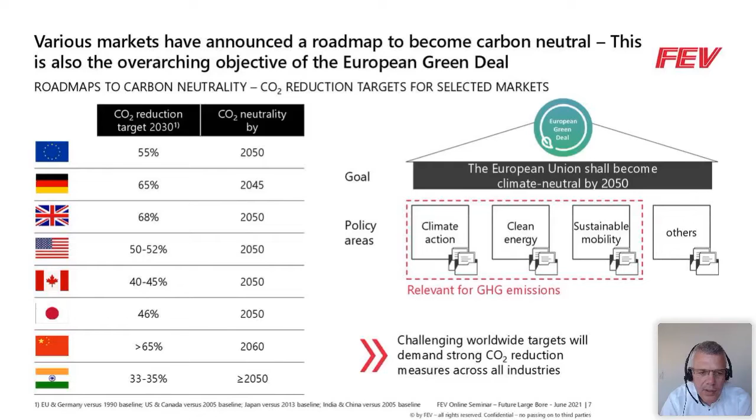So the key message here: these challenging worldwide targets will demand strong CO2 reduction measures across all industries. There will be no industry in the future that can neglect these overarching CO2 reduction targets. And if we talk about the contribution to overall worldwide CO2 emissions, the clear message from this slide is that the large bore engine sector is also a very important contributor.

On the other hand, for all of these industries, initiatives have already been started and put in place. Looking at marine, we have the IMO greenhouse gas reduction targets, minus 50% until 2050, and the long-term target to become greenhouse gas neutral by 2100 at the latest. There is also the so-called Getting to Zero Coalition, where some of the main marine fleet owners have already defined targets to become CO2 neutral at a much earlier point, in the 2030 timeframe.

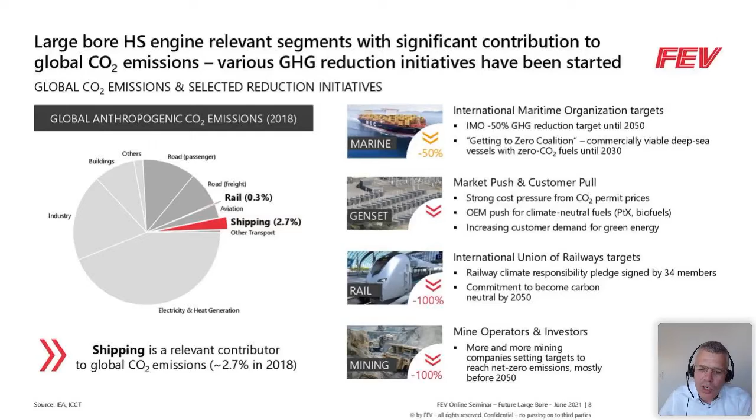For the generator set market, we also see a strong push. We have cost pressure from CO2 permit prices, and increasing customer demand for green energy. The rail industry has a commitment to become carbon neutral by 2050. And more and more mining companies have set targets to reach at least net zero emissions, mostly before 2050.

Let's take a closer look at the marine industry in the following slides. Focusing on marine, on the one hand, we have the IMO emission limits, which are not the key focus of today's presentation. On the other hand, we have several measures that already address reduction of CO2, respectively greenhouse gas emissions. First, the EEDI, the Energy Efficiency Design Index, which defines targets for CO2 emitted per unit of transport work. This includes, for example, the fuel consumption of main and auxiliary engines, so directly addressing the high-speed engines here.

In addition, we have the so-called Ship Energy Efficiency Management Plan, a mechanism to improve energy efficiency during ship operation and manage ship and fleet efficiency. And last but not least, as mentioned before, we have the IMO greenhouse gas targets, which set a roadmap for mid- and long-term greenhouse gas emission reduction for the marine industry. In addition, there might be local requirements, some market areas or cities, which will most probably define individual targets in the future.

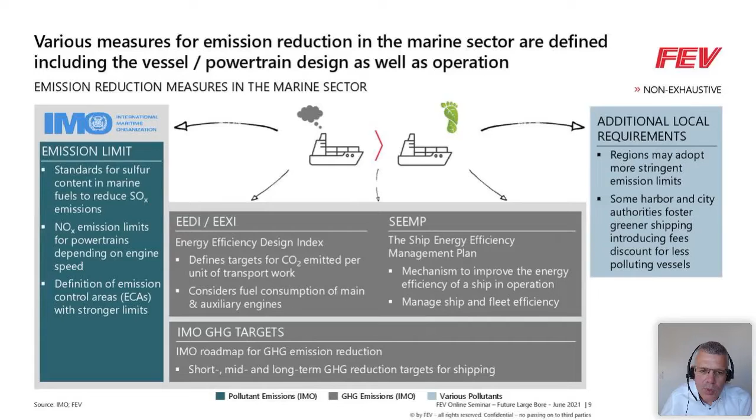How does that look from the timeline perspective? To focus first on the EEDI and SEEMP regulation: the first steps of the regulation are already in place. The next step of the regulation is also partly defined, or at least some targets for the long-term perspective are already defined.

In addition to that, we have the greenhouse gas reduction target, the minus 50% reduction in global greenhouse gas emissions from shipping until 2050, and at the latest by 2100 to become zero greenhouse gas. And very important to have in mind, this is not just related to new shipbuildings. This is the overall greenhouse gas emissions from the marine fleet.

And in addition to that, as already mentioned, there are also several voluntary CO2 emission targets, like, for example, the Getting to Zero coalition, where targets to become CO2 neutral even at an earlier point of time have been defined.

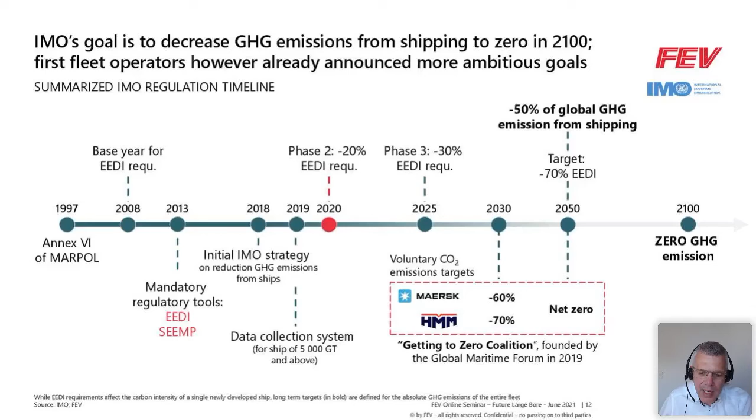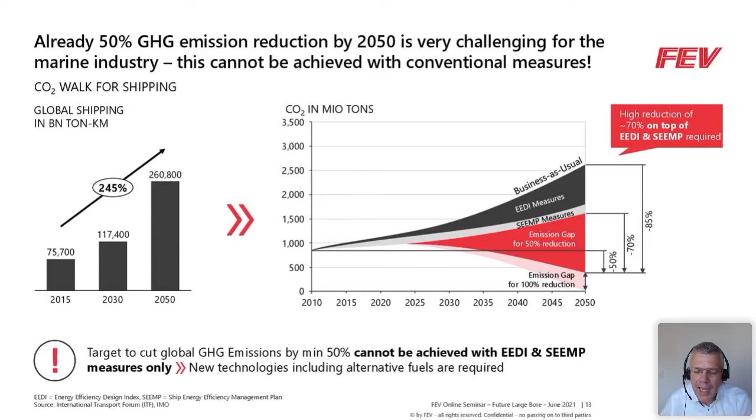On the other hand, and this is what we wanted to point out on the right-hand side of that slide, even if we take into account the EEDI measures and the SEEMP measures, as introduced on the previous slides, there most probably will still remain a significant gap, even if we just look at the 50% reduction target in the 2050 timeframe. There will be a huge gap with regard to CO2 reduction, which has to be filled with additional measures. So new technologies, especially including alternative fuels, need to be introduced into the market in order to comply with these CO2 reduction targets.

On the other hand, it's not just the regulation which is putting a lot of pressure on reducing CO2 greenhouse gas emissions in the future. It's also, as already mentioned, the large fleet operators. Some of them want to become forerunners with regard to sustainability trends. There is also the increasing demand with regard to life cycle assessment. More and more companies are looking to a sustainable value chain, the green image.

We also have the green image being demanded by commercial yacht owners, for example, sustainable luxury yachts. And there is also, to a certain degree, public pressure to include other industries, not just on-road transportation, with regard to future CO2 reduction needs.

So what are the options in order to address the future CO2 reduction needs? In the end, we have several options. We still have engine optimization. We have electrification measures, hybridization, battery electric. We have fuel cell technology, and we also have various alternative fuel options here.

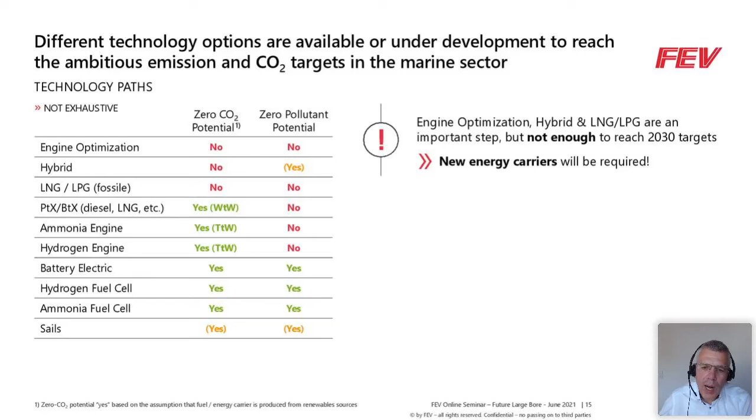So in order to achieve zero CO2 or a significant reduction in CO2 emissions in the future, most probably engine optimization, hybridization, and the use of fossil LNG or LPG will not be sufficient to reach the future greenhouse gas targets. This clearly means we will require new energy carriers, and there will be additional challenges related to that. What about the infrastructure? What about the availability of the fuel? What about the distribution network? What about the bunkering capabilities in the marine sector, for example?

What about energy storage? How easily can a certain fuel option or energy carrier be stored? What about a joint fuel strategy, as investment needs to be made for the different fuel options? And finally, which costs are related to the different options here.

We expect that there will be different technology strategies, and we will come back to that in more detail in the following slides, depending on application type and probably also on specific market areas. One always needs to find the right trade-off between the application fit, infrastructure availability, and the related cost implications.

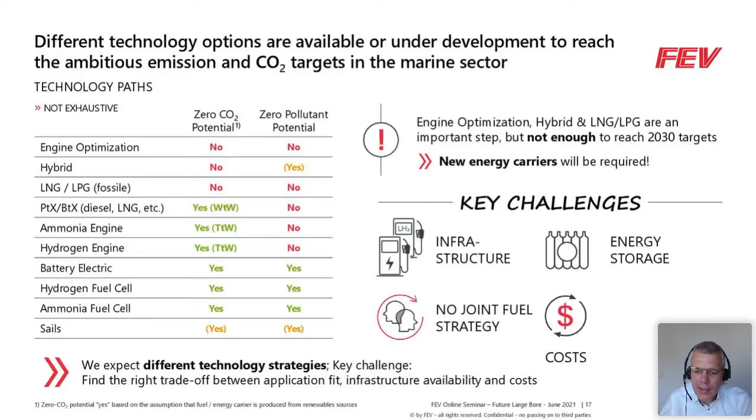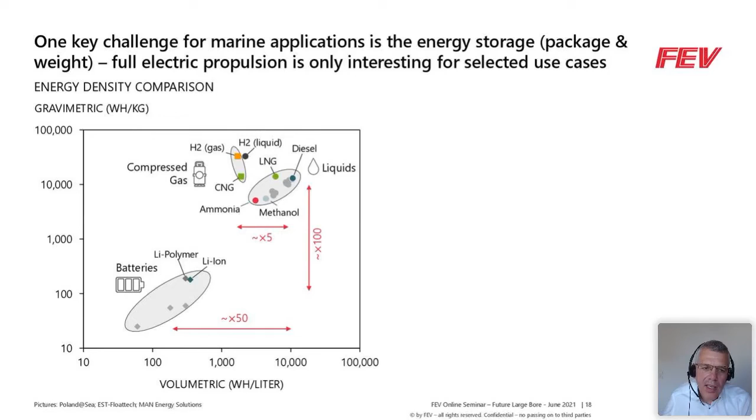a gravimetric basis. If we consider the gaseous fuel options, in particular with regard to volumetric energy density, there are some quite significant drawbacks. And if we take battery electric into account, it's even more than an order of magnitude that we see here as a drawback with regard to energy density on both a volumetric and gravimetric basis.

And taking that into account, I think one clear message will be, maybe a bit in contrast to the on-road sector, that full electric propulsion just has a limited capability for the typical large bore applications. If we talk about battery electric, we will need significant volume for the energy storage. The batteries also will be related to very high costs, and in the end, electric propulsion probably will only be suited for some selected use cases.

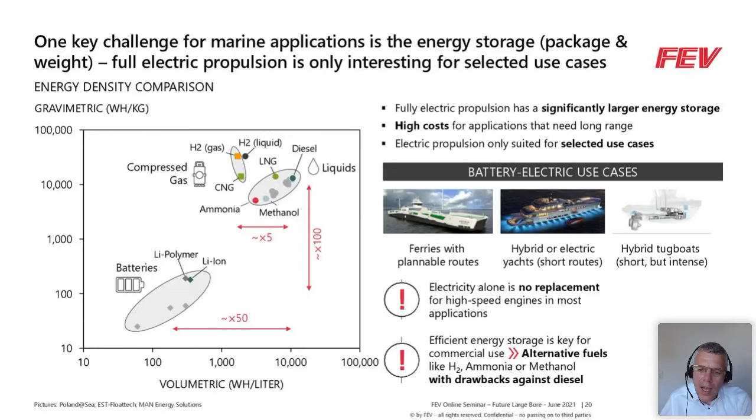Yes, for a ferry with a plannable route, maybe a super yacht application, or also a hybrid tugboat, this is really an interesting solution. But for other applications, electricity alone probably cannot be the only replacement for high-speed engines. So we need alternative fuel options like hydrogen, methanol, ammonia, and also other fuels derived from renewable energy sources.

And as we have now focused a lot on the marine sector, this slide clearly states it's not only the marine sector. Also for the other industries relevant for high-speed large bore engines, whether we talk about generator sets, rail, the mining sector or the larger construction machines, we have corresponding defossilization needs for these applications.

For the generator sets, as mentioned before, customers are also asking for green solutions, and we will still need internal combustion engines for data centers, for peak shaving, also in combination with regenerative power in the future. In the rail sector, there will always be some market with low or limited electrification shares. We sometimes have the challenge of last mile delivery, for example in harbor areas, where we might still need internal combustion engines.

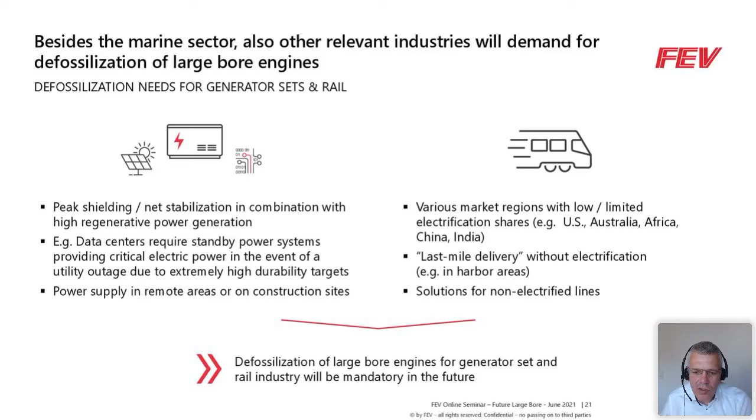And then, of course, the question will come up: what is the most feasible, best fitting solution with regard to alternative energy carriers? And the clear message from that slide: there will not be the one and only solution. It will not be black and white. If we look at the left-hand side of the slide, where we assessed three examples of alternative energy carriers against different criteria, we can easily see there are pros and cons for each

of these energy carriers. Whereas hydrogen has clear benefits when it comes to greenhouse gas emissions and local pollutant emissions, hydrogen has significant drawbacks with regard to infrastructure and onboard storage. And this is where the liquid fuels, like methanol, show their benefits. On the other hand, with regard to overall greenhouse gas emissions and local pollutant emissions, there are some drawbacks compared to hydrogen as an alternative fuel.

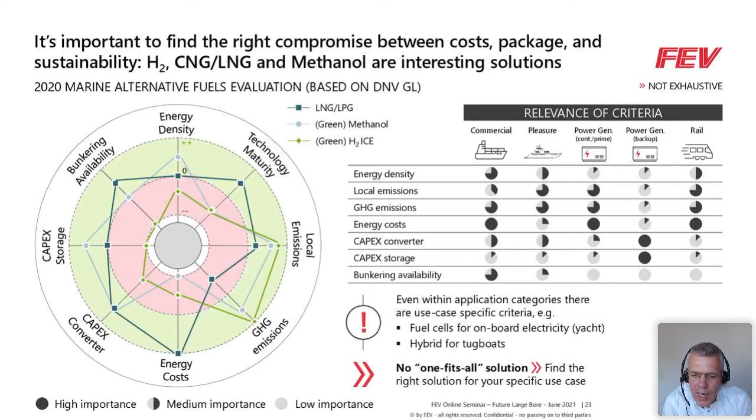And now looking to the right-hand side of the slide, at the different application types where we assessed the relevance of these criteria, we can also easily see the relevance is different for the different application types. And this clearly leads to the conclusion that there will not be one fits-all solution, but one needs to find the right solution for each specific use case.